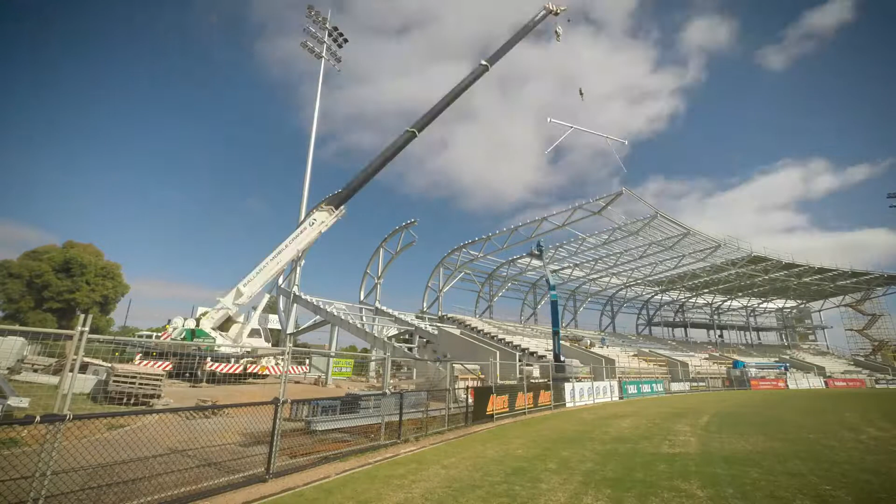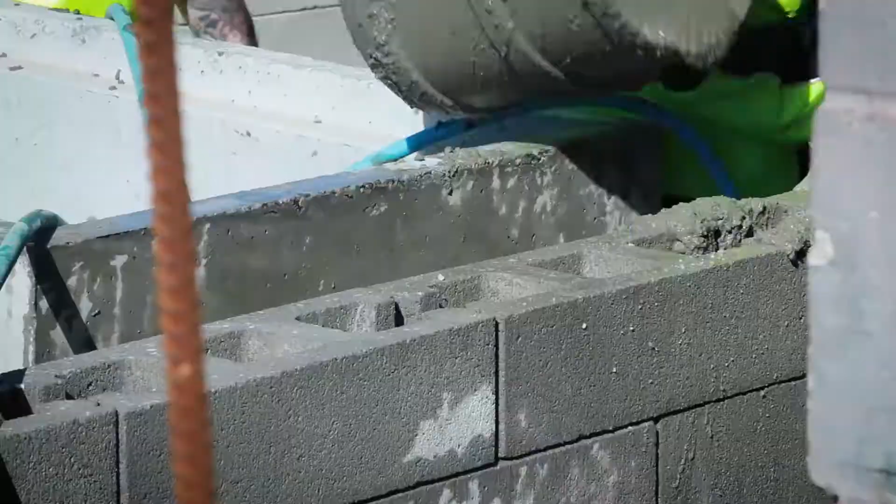Progress continues at Eureka Stadium, with not only the western stand roof structure being almost complete, but a lot of the less visible work is also well underway. We thought it would be interesting to share how the project and especially the roof structures have been engineered to withstand the forces of nature and human impact.

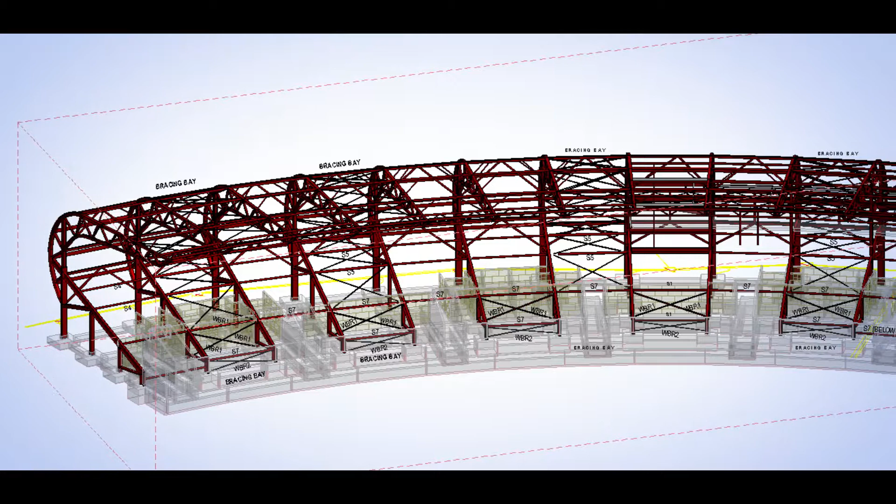What we have in Eureka is a cantilevered stadium roof. It is an integral part of the seating and also the external facade. So it's a three-dimensional structure that comes together to resist the forces that act on it, mainly wind and earthquake.

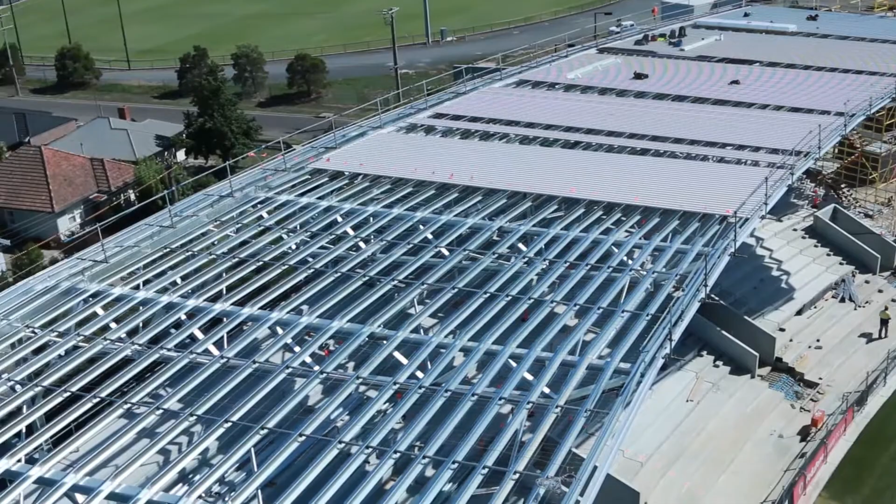In terms of the distribution of the loads to the trusses and to the main supporting members, really it's a simplistic metal deck roof that you would find in a warehouse or elsewhere. It's basically a series of cantilevers with infill framing in between to create the form, and the main feature is the curved arch that forms the main members.

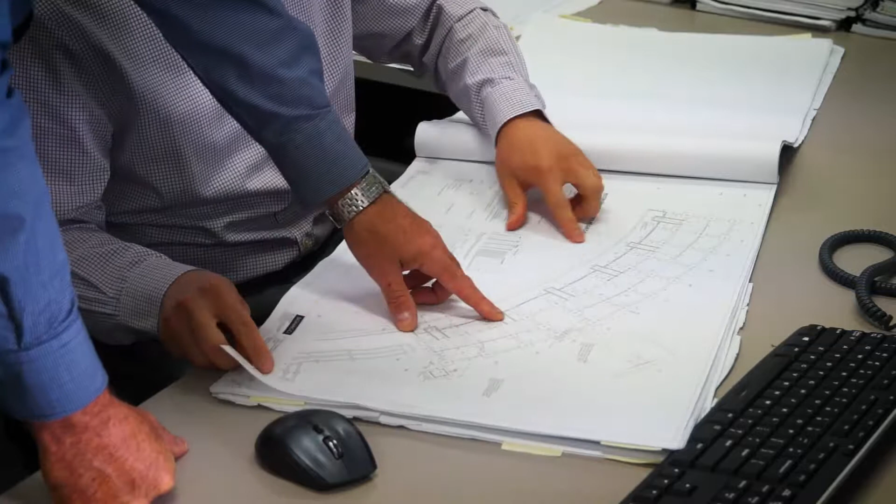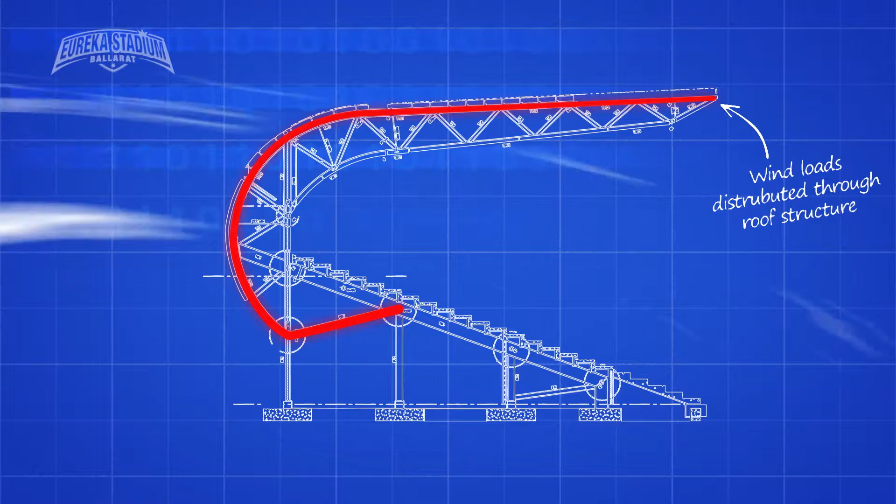It comes with a lot of challenges in that it's how do we ground the load from the cantilever back down into the ground, and so an interesting process on this particular stadium is where we're using the actual seating structure to stabilise and ground the structure. It actually works in a 3D form, and the forces are all interrelated between the curved roof, the seating members, and the structural steelwork underneath.

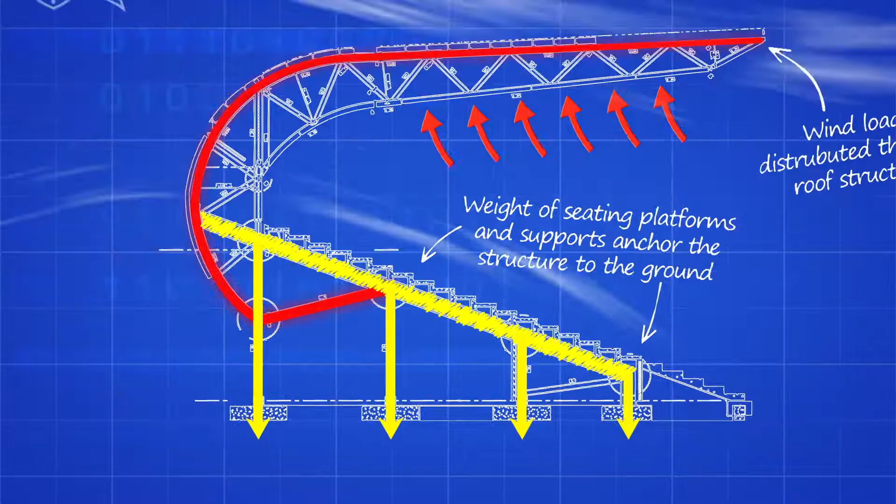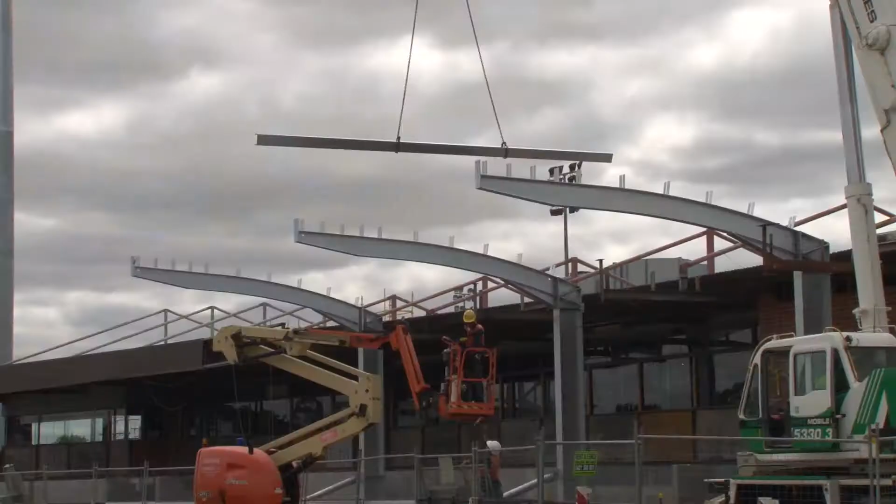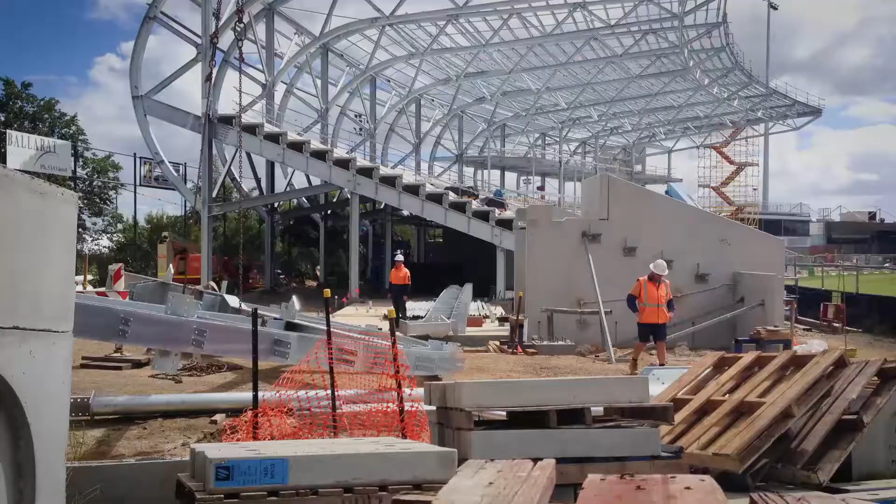Well, in terms of the budget, we all knew that the budget was going to be tight, and the team was well aware of it. So it was important that we came up with an efficient, cost-effective structure. So we tried to use as much standard form materials that's available to us from a structural perspective, and we tried to simplify the whole geometry of the structure so it became efficient.

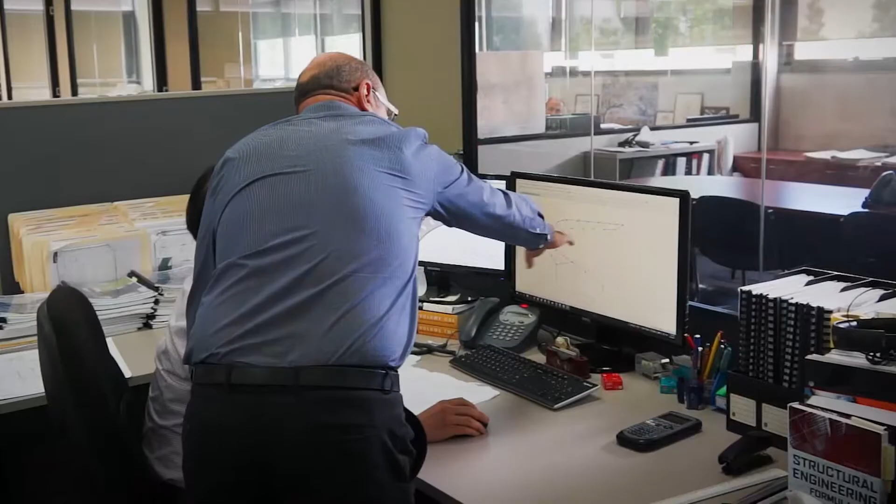If your scale is too big, then it may not be appealing architecturally. So there's a balance between what we can achieve from a structural perspective and an economical design. And then we've had the third element where the builder has come in and reviewed the structure and made suggestions for improvements or modifications. So it's been a three-pronged approach, a lengthy process in terms of time and effort to make sure that we can get the project on budget and where it needs to be for the city of Ballarat.

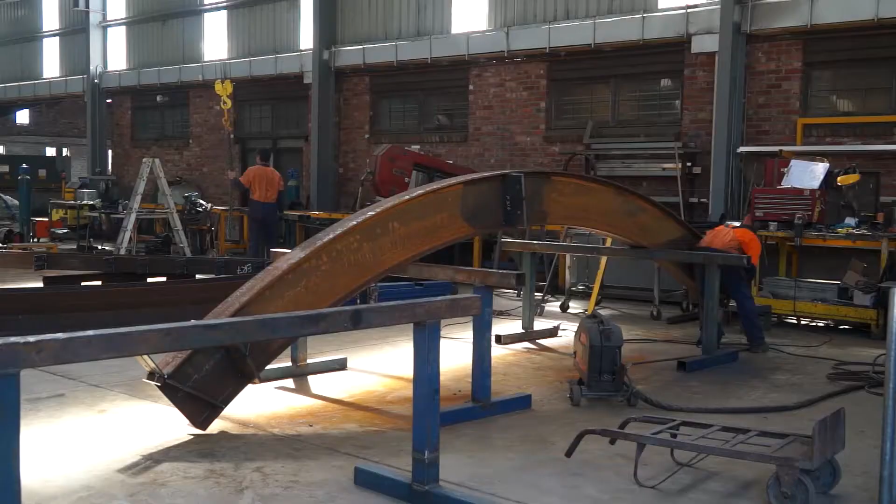In the next video, we meet with the steel manufacturers who created the structural elements of the stadium, together with another update on the progress of Eureka Stadium, Ballarat.